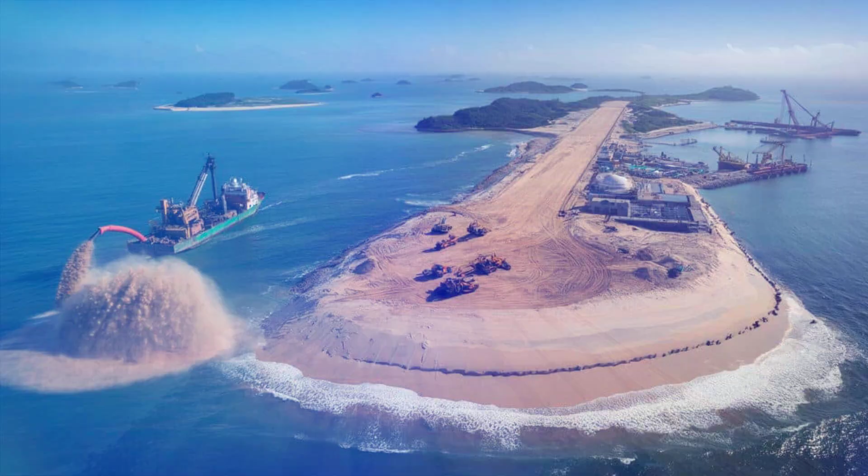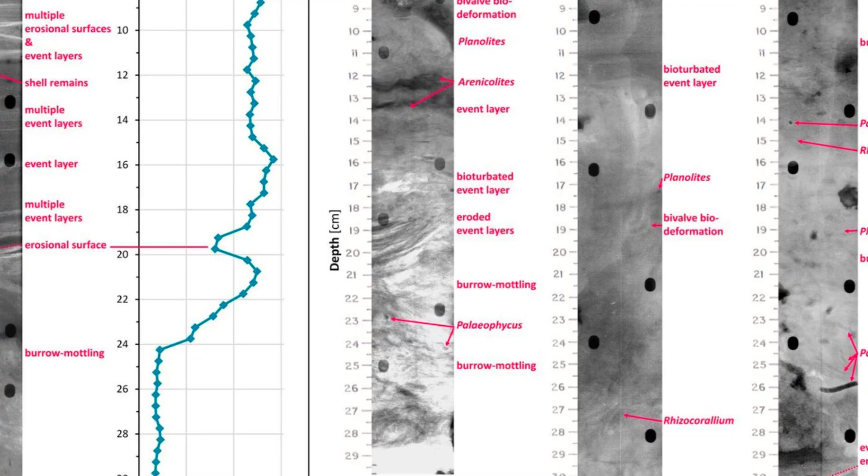They built an entire airport on land that didn't exist a decade ago, an island engineered from the sea. A new Earth built at a reported multi-billion-dollar cost. But beneath this new Earth, the ground is still settling, squeezed downward by hidden layers of soft marine sludge. Some satellite-based models warn that subsidence could reach 80 millimeters each year in places.

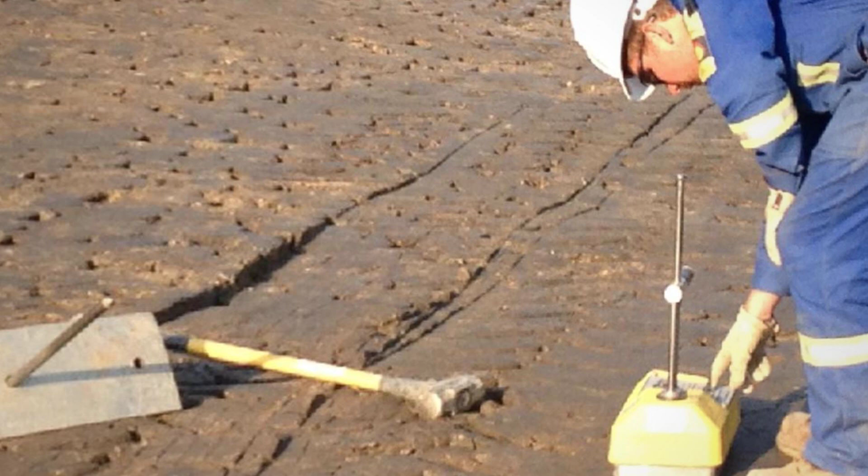The stakes are simple. If engineers can't stop the sink, this could become a permanent repair nightmare instead of a triumph of infrastructure. The real story begins with how they made the island and why the ground may never truly stand still.

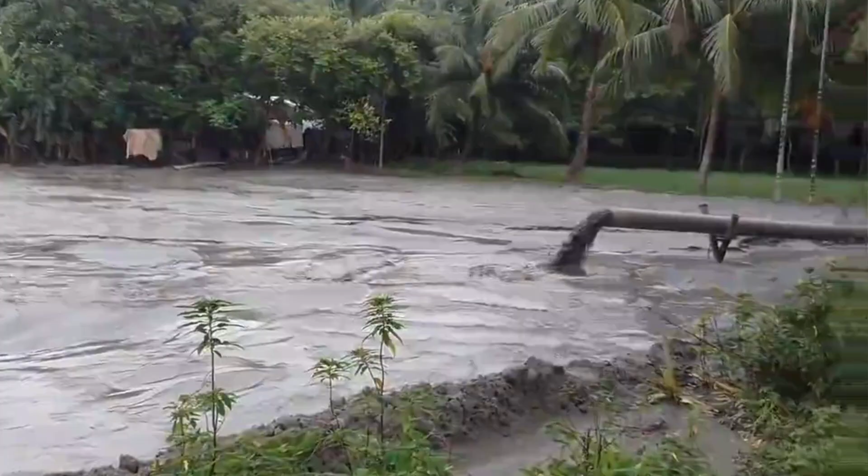In Jinzhou Bay, just off the coast of Dalian, a stretch of open water transformed into solid ground. By the early 2010s, fleets of dredgers and barges began pumping sand and rock into the sea, shaping an artificial island where only waves had rolled before. The footprint is staggering, 21 square kilometers, larger than some city centers.

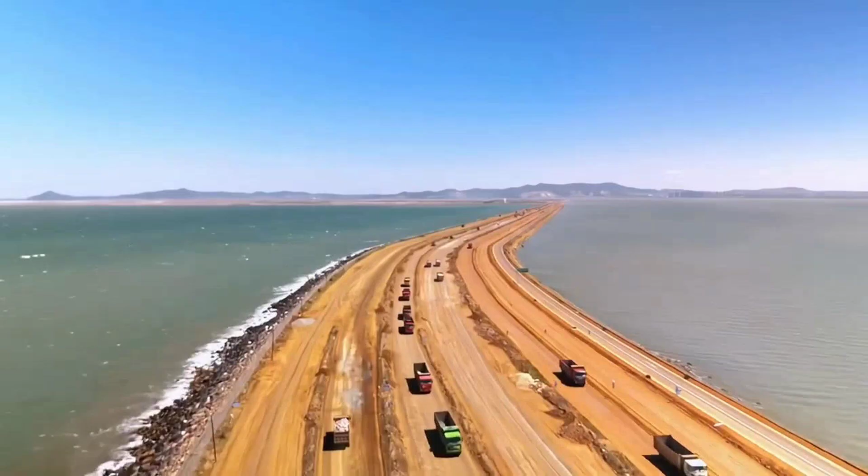In less than a decade, this patch of ocean was filled, leveled, and sculpted to support the weight of a future mega airport. The land didn't simply appear overnight. It rose through millions of tons of fill, layer by layer, as engineers battled tides and shifting currents. Construction started in 2011, even before full national approval, a sign of the urgency to relieve Dalian's overwhelmed old airport.

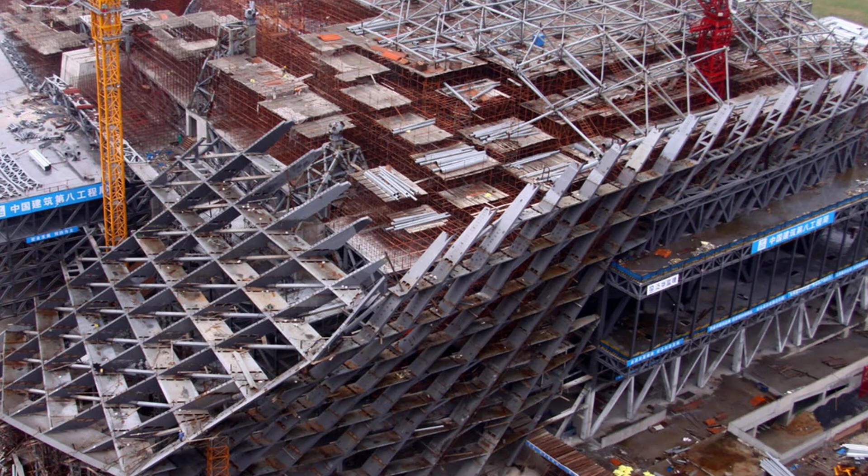By 2024, the new island stood ready for its next phase, already bearing the outlines of runways and the foundations for a terminal designed to welcome tens of millions of travelers. From above, the reclaimed land stretches out in geometric precision, a man-made platform built to handle the world's largest jets. The ambition is clear: to create not just a new airport, but a new piece of China's coastline, engineered from scratch in less than a generation.

Dalian's old airport, Zhoushuizi, once sat on the city edge. Over decades, the city pressed in from all sides, swallowing up open land and closing off every path for expansion. Apartment towers, factories, and highways hemmed in the runways until there was nowhere left to grow. By the early 2000s, the airport's single airstrip was handling more flights than it was ever designed for, with passenger numbers climbing past 19 million a year.

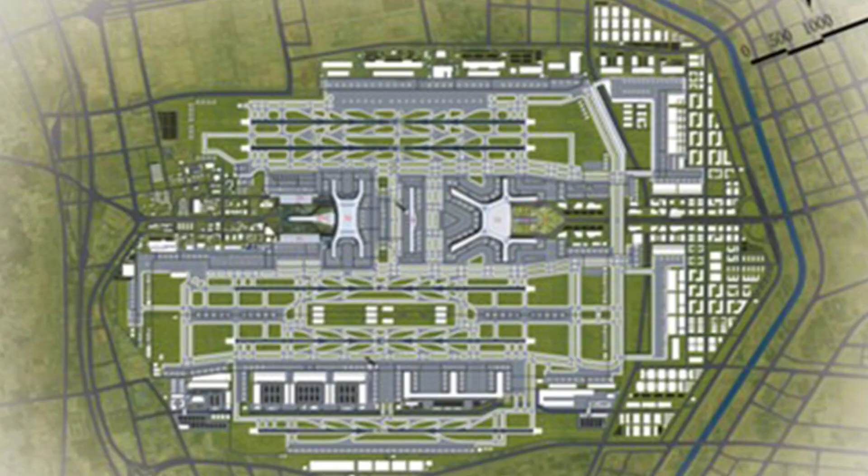Five rounds of upgrades squeezed out every last bit of capacity, but the problems only got worse. Noise complaints rose as jets skimmed low over new neighborhoods. Cargo traffic jammed local roads, and even small delays rippled across the entire network. Planners studied every option: extending runways, building new terminals, tunneling under roads. But the city's relentless growth had boxed them in. There was simply no land left.

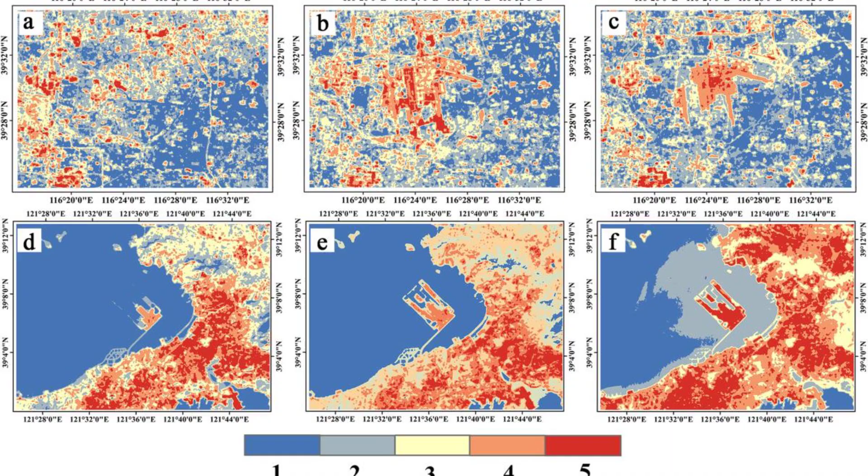When national aviation authorities reviewed Dalian's future, the answer was clear. Relief would only come from outside the city grid. The only way to break free from the urban chokehold was to look offshore, beyond the reach of real estate and traffic. That is why the plan for a new airport was not just about bigger terminals or more gates. It was about creating room to breathe by building an entirely new platform out at sea, far from the limits that had turned the old airport into a bottleneck.

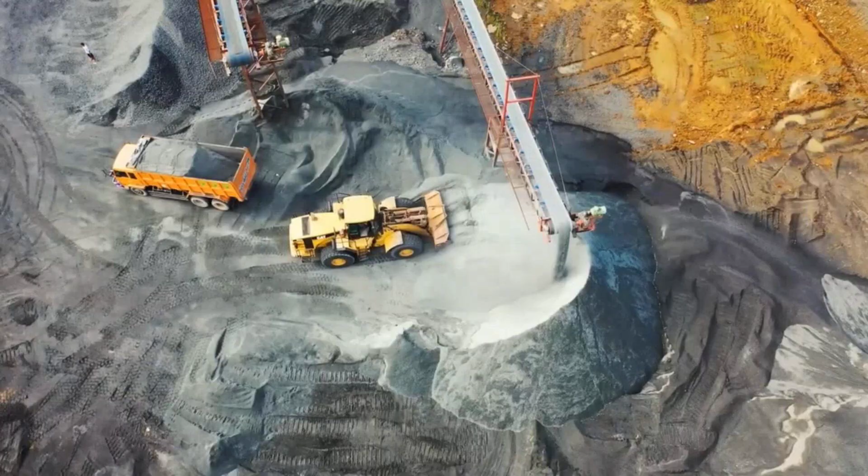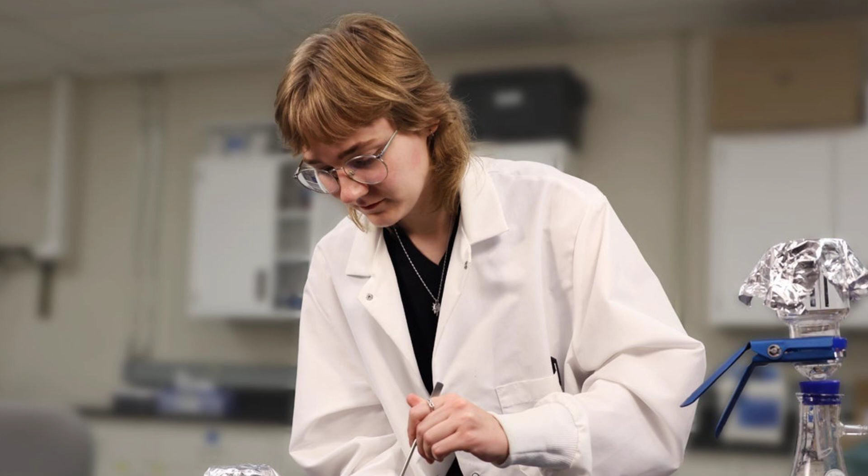Imagine pressing down on a soaked kitchen sponge. At first, it feels soft and squishy, water oozing out with every push. That is almost exactly how the seabed beneath Dalian's artificial island behaves, except on a scale of millions of tons. The fill material, piled high to form the airport's foundation, sits atop layers of mud and silt that act like a giant, waterlogged sponge. When heavy weight is added, the pressure forces water out of the spaces between the tiny soil particles. But unlike a sponge on a countertop, this process takes years, sometimes decades.

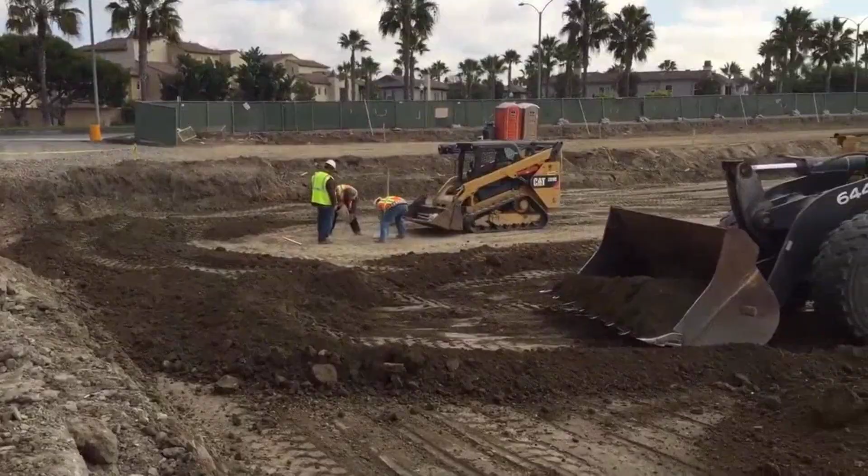The ground does not spring back or instantly firm up. Instead, it compresses slowly, and the surface sinks a little more each season. The challenge for engineers is that this settling can continue long after construction. If the ground keeps compacting, runways and taxiways risk dipping or cracking. Understanding this simple sponge effect is the key to why building on soft marine sludge is never just a one-time job. It is an ongoing battle with the forces hidden below the surface.

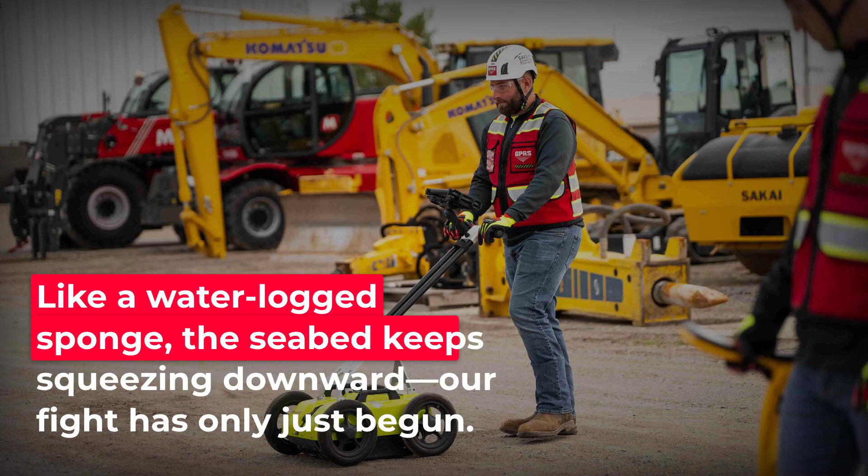Satellites orbiting hundreds of kilometers above the Earth keep a silent watch on Dalian's artificial island. Using a technique called InSAR, they scan the reclaimed land with radar, measuring tiny shifts in elevation that would be invisible to the naked eye. Over months and years, these readings reveal a pattern. The ground beneath the airport is moving, slowly but steadily.

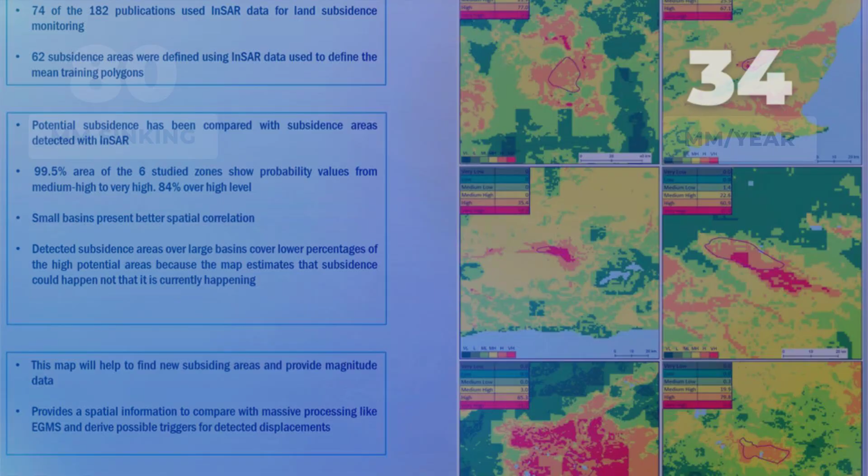Analysts studying this data report that parts of the new island are subsiding by 80 millimeters per year, plus or minus 25 millimeters. This is not a single snapshot, but a trend, one that matches what engineers fear most about building on soft marine sediments. Every new layer of fill and every foundation poured adds more weight, squeezing water from the mud below and causing the surface to drop.

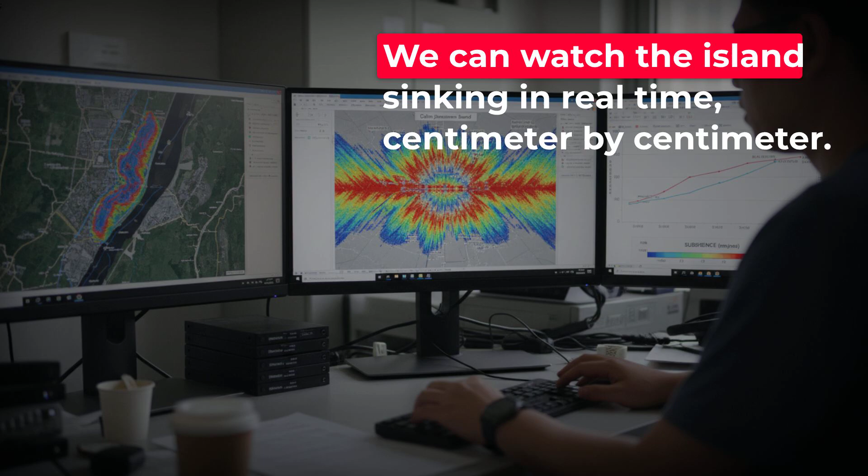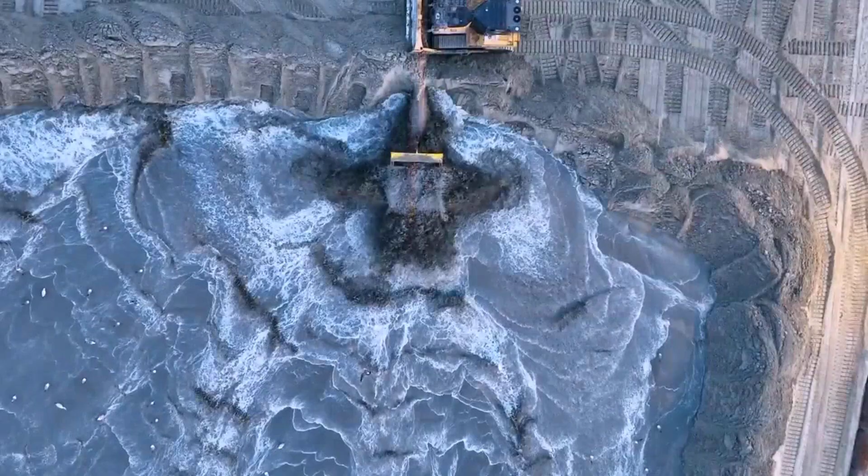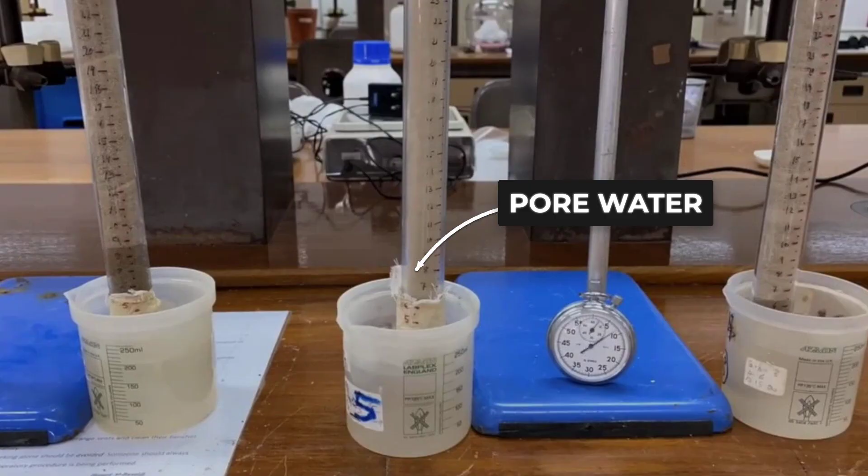Beneath the new island, the process at work is consolidation. When millions of tons of sand and rock press down on a soft seabed, the pressure forces water out of the mud below, and the ground slowly compresses. This is not a sudden collapse, it is a gradual squeeze. Water moves upward through tiny spaces between soil particles, and the land settles bit by bit.

The heaviest sinking happens in the early years after reclamation, when the fill is freshest and the mud is loosest. Over time, as more water escapes and the soil particles pack tighter together, the rate of settlement slows, but it does not stop completely. Even after the surface seems stable, small movements can continue for years, sometimes decades. This lingering uncertainty keeps engineers on edge.

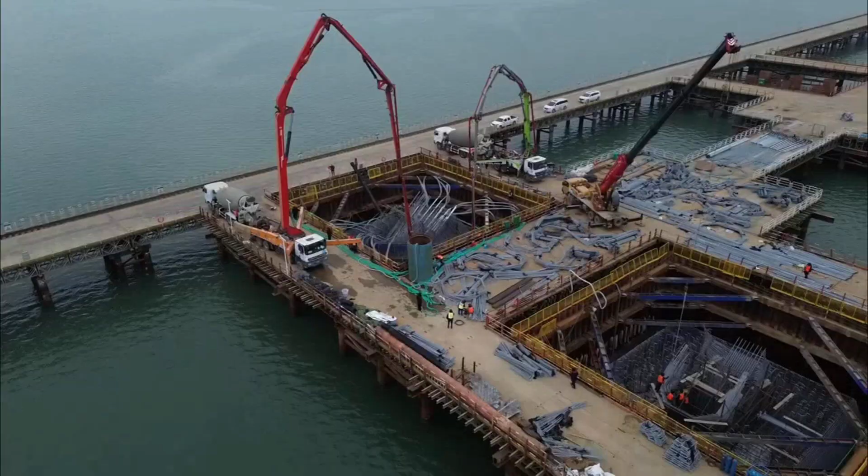The future of the airport depends on how fast the ground firms up, and whether the pace of sinking drops low enough to allow safe construction of runways and terminals. If the soil keeps settling too quickly, the surface could dip unevenly, threatening everything built above. To keep the ground from sinking beneath their feet, engineers turn to a toolkit built for the world's softest soils.

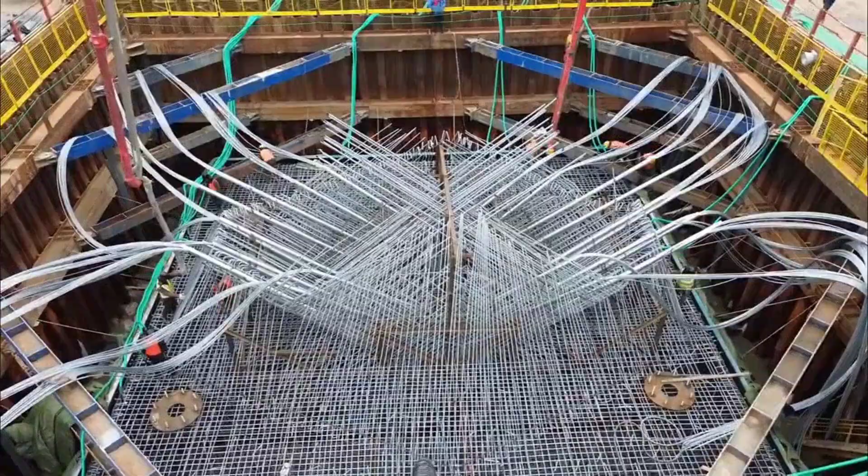The battle began with deep foundation treatment, 77,000 square meters of reclaimed land reinforced to take the weight of runways and terminals. In projects like this, one common method is vacuum preloading. By laying a membrane over the surface and drawing out air and water with pumps, the process squeezes the mud below, forcing it to settle and firm up in months rather than years.

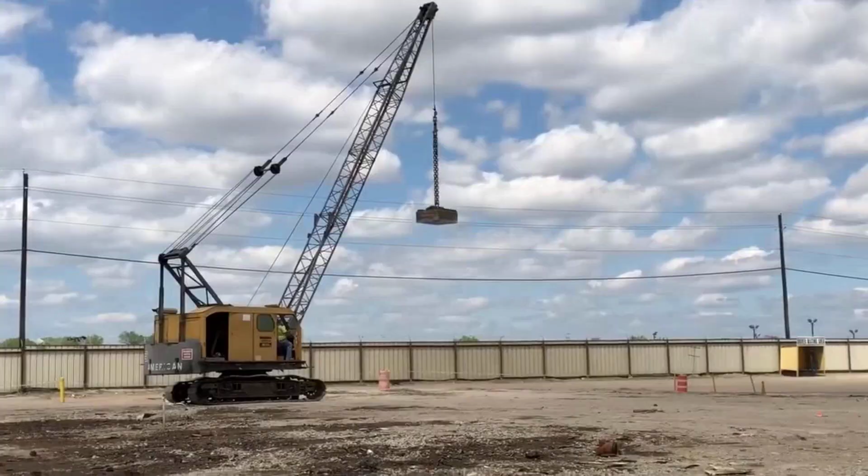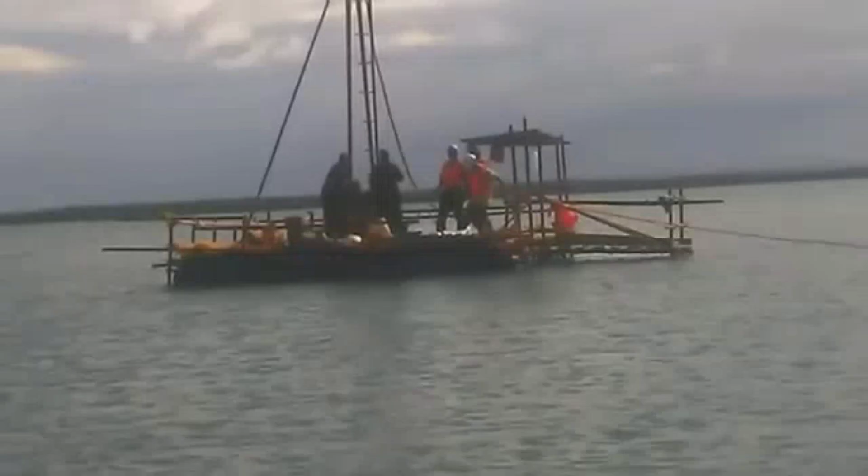Another tactic often used is dynamic compaction. Heavy weights dropped again and again to shake loose sand and silt into a denser, more stable base. Where the soil is too soft, even for that, engineers rely on deep piles, columns of concrete or stone, driven down through the weak layers, anchoring structures to firmer ground far below.

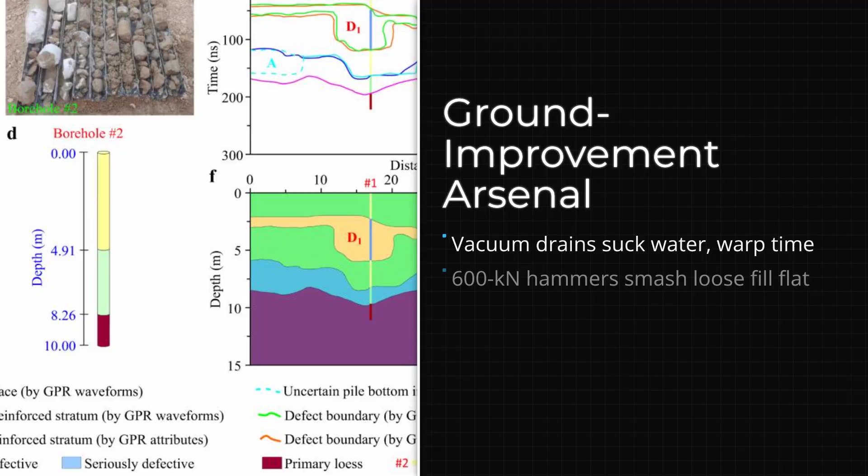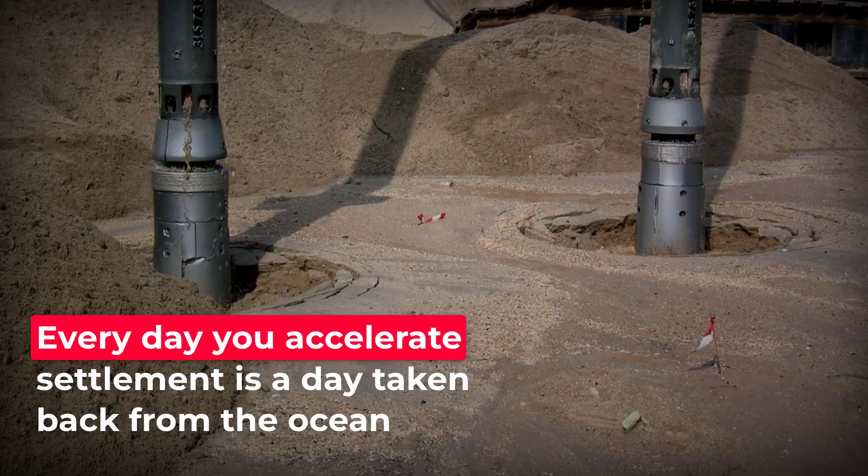Each technique aims to speed up consolidation, control uneven settlement, and buy time for the airport foundations to lock in place. As one academic from Dalian University of Technology puts it, "Every day you can accelerate settlement is a day you take back from the ocean." These methods are not just theory, they are the main line of defense against the slow, relentless squeeze of the seabed, with sensors and gauges tracking every millimeter of movement as the battle continues underground.

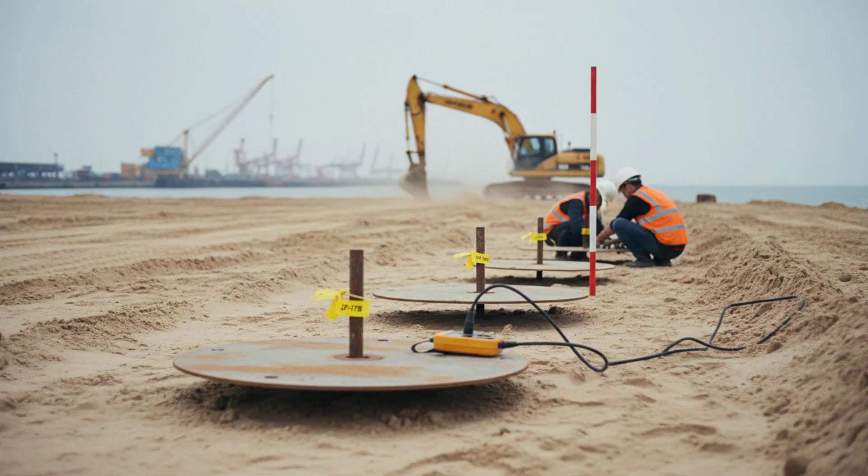Sensors dot the reclaimed ground buried beneath runways and terminal foundations, working around the clock. Settlement plates, simple steel discs anchored deep into the fill, track how far the surface drops over time. Each plate is measured again and again to reveal if the land is settling evenly or if trouble is brewing beneath a certain stretch of pavement.

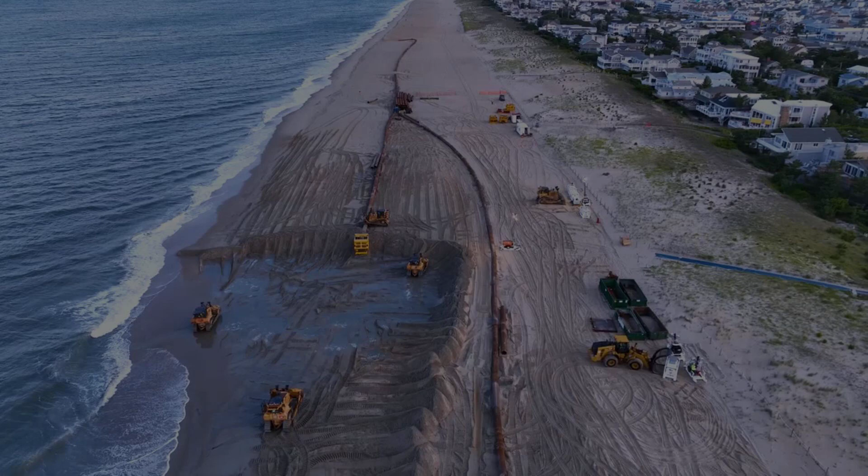Pore pressure gauges, meanwhile, are threaded into the soft layers below. These instruments measure how much water remains trapped between soil particles, a direct signal of how much consolidation is left to go. As water pressure drops, engineers know the ground is firming up, but these readings are only part of the story.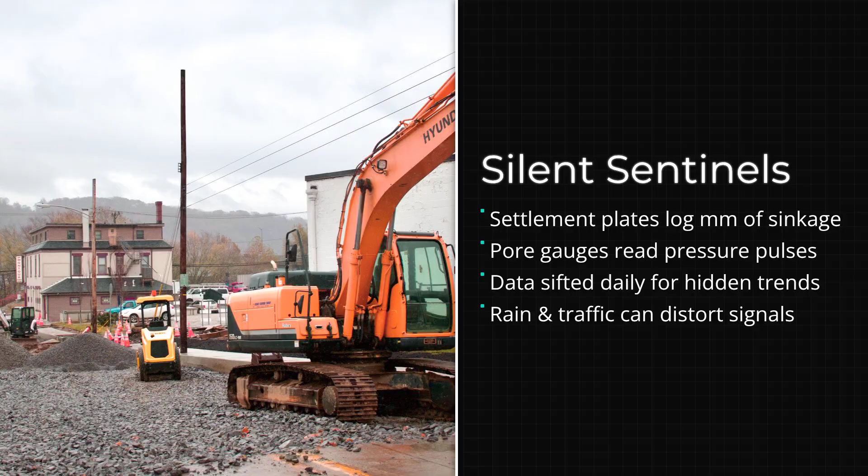In a landscape built from scratch, every number comes with caveats. Some sensors can miss sudden shifts in areas beyond their reach. Others might be thrown off by heavy rain, construction traffic, or even a change in temperature. The real test is not just in the data itself, but in how it is interpreted. Engineers pore over these numbers, looking for patterns and warning signs.

Success is not measured by a single reading, but by a trend: settlement rates slowing, water pressures dropping, and the ground acting more like solid earth than a floating raft. These are the quiet victories that mark progress in a project where the enemy is invisible and always moving.

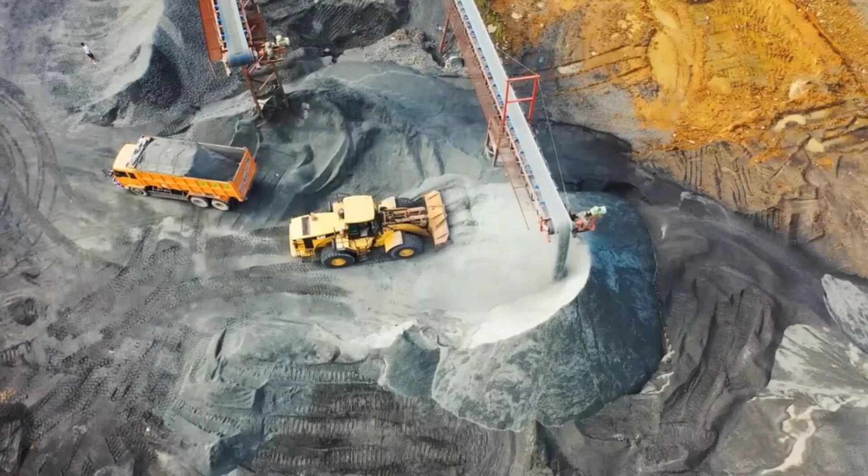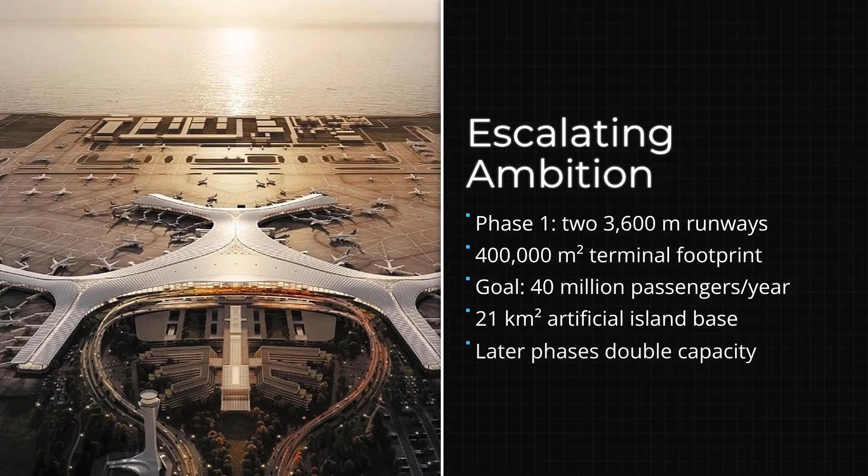The airport's ambitions are measured in phases, each one raising the stakes for what this artificial island must support. The first stage is already massive by global standards, with 2 parallel runways, each stretching 3,600 meters, and a terminal of 400,000 square meters. Depending on which official statement you read, Phase 1 is designed to handle anywhere from 31 to 43 million passengers a year, nearly double the old airport at its peak.

Cargo targets in this initial build reach 650,000 tons annually, a figure that would place the airport among the country's busiest freight hubs from day one. But these numbers are only the beginning.

Plans for the full build-out call for 2 more runways, bringing the total to 4, and an expanded terminal footprint that could swallow up nearly 1 million square meters. If every expansion is realized, the airport's ultimate capacity could reach 70 to 80 million passengers a year and 1 million tons of cargo. These are numbers usually reserved for the world's largest aviation gateways.

Each phase locks in more weight, more traffic, and more pressure on the ground below. The prize is clear: a new gateway for Northeast Asia, built on land where none existed before. But as the scale grows, so does the risk that the ground may not keep up with the vision.

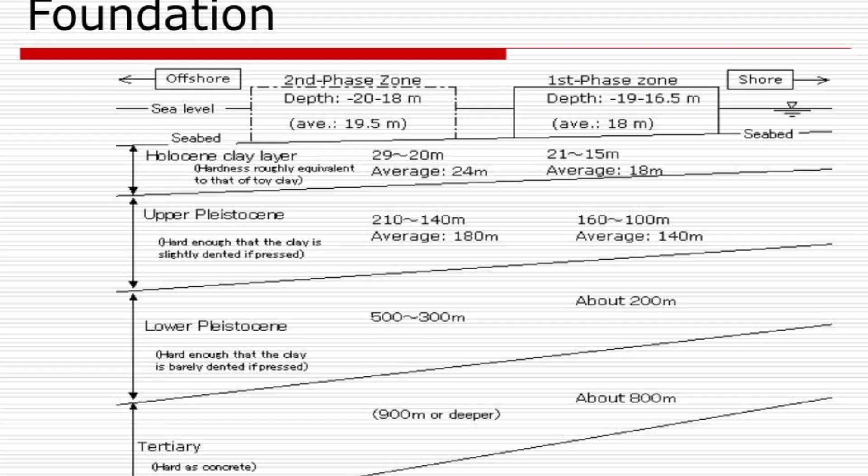Kansai International Airport in Japan stands as a cautionary tale for anyone building on reclaimed land. When it opened in 1994, engineers expected the artificial island to settle, but no one predicted just how much. Over the next 2 decades, the ground dropped more than 11 meters. That was far beyond early forecasts. Each year, the airport runways and terminals inched lower, forcing teams to jack up buildings, reinforce seawalls, and run pumps day and night to keep water out.

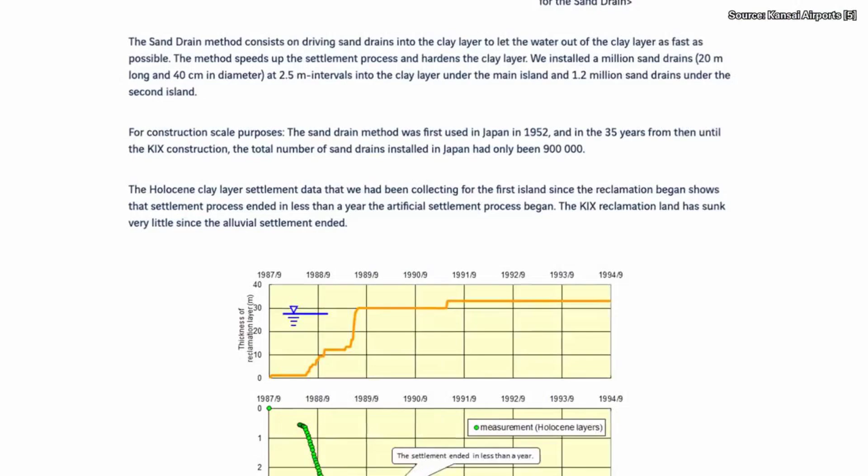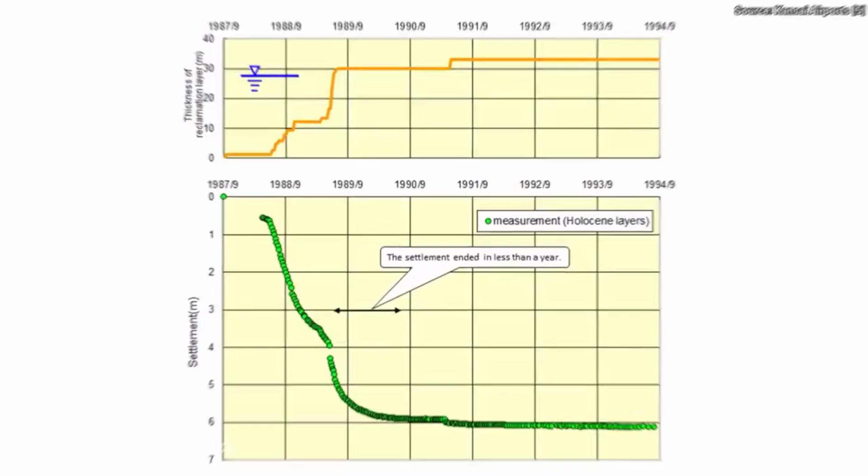The costs never stopped. By 2010, Kansai's ongoing mitigation had already swallowed billions of dollars, with maintenance budgets stretching into the indefinite future. A longtime airport engineer described the problem plainly. "We designed for the ground to move, but it kept moving, year after year, and every fix became part of the routine." Even today, Kansai's island still sinks, though at a slower pace, and the airport's survival depends on a permanent commitment to repairs.

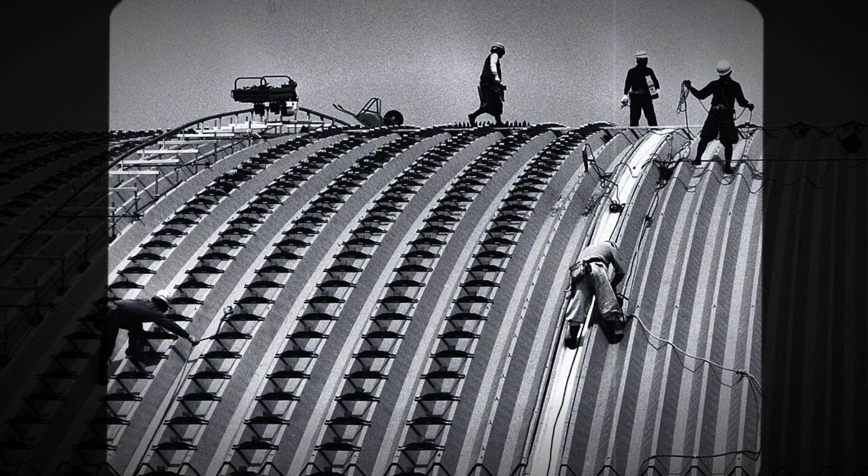The lesson is clear: on soft marine sediments, settlement is not a one-time problem. It is a legacy that can last for generations, with every meter of subsidence leaving a bill that never quite goes away.

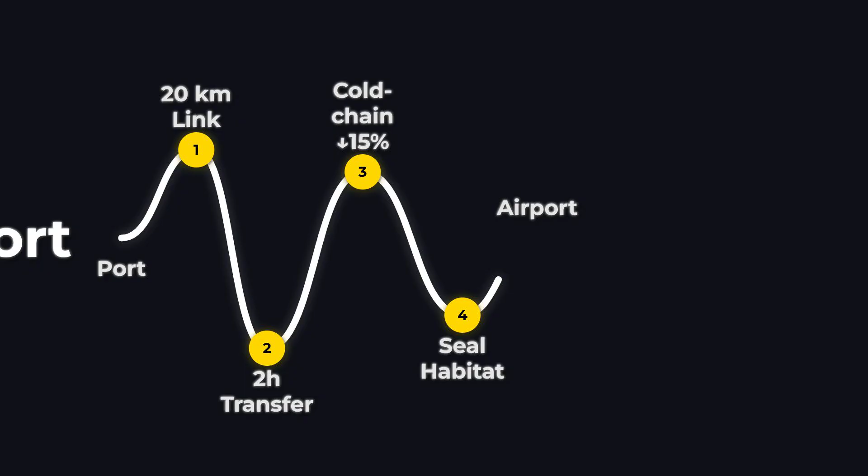Port officials in Dalian see the new airport as more than just an answer to crowded runways. They see it as a gateway that finally links air and sea freight in one seamless logistics network, connecting cargo ships and jetliners under a single plan. For a port city competing with giants like Shanghai and Incheon, the integration is a strategic bet. The payoff could be enormous: faster shipping times, new trade routes, and a surge in economic activity that ripples through Northeast China. One logistics planner puts it simply: you can't grow the port or the airport without more space. Here, we get both.

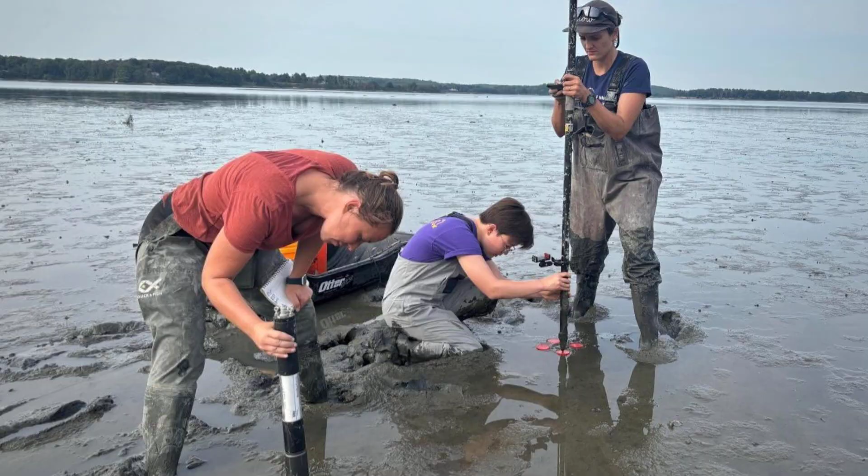Every gain comes with a cost. Marine biologists warn of risks tied to large-scale reclamation. Jinzhou Bay, part of the Bohai Sea, is home to spotted seals, an iconic species that migrates along these coasts. Regional research warns that noise, sediment plumes, and habitat loss can disrupt seal behavior and threaten local populations. Construction windows are sometimes adjusted to avoid peak migration, but the long-term effects remain uncertain.

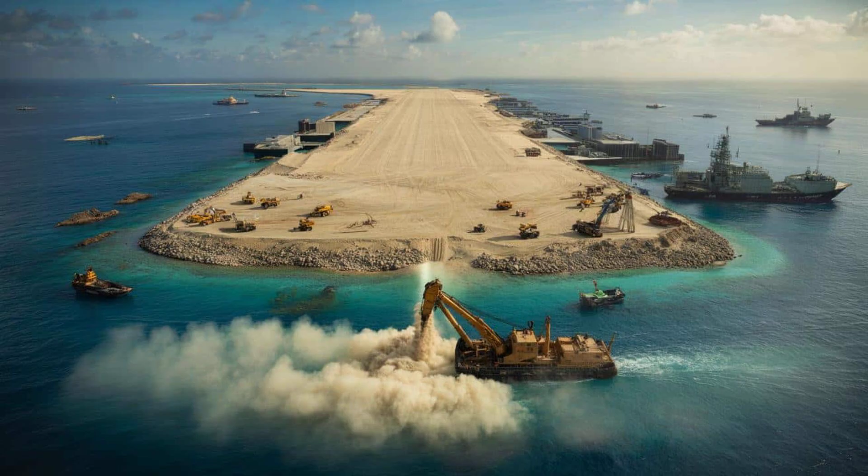A marine scientist says, "Big infrastructure always brings trade-offs. The challenge is balancing economic ambition with the health of the ecosystem." For Dalian, the promise of a world-class transport hub is weighed against the responsibility to protect a unique marine environment. The final verdict on that balance will play out over decades as both ships and seals navigate the changing shores of Jinzhou Bay.

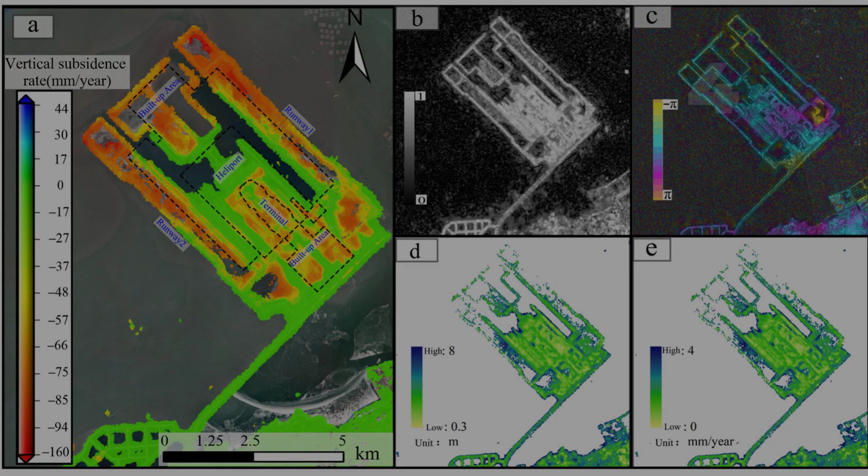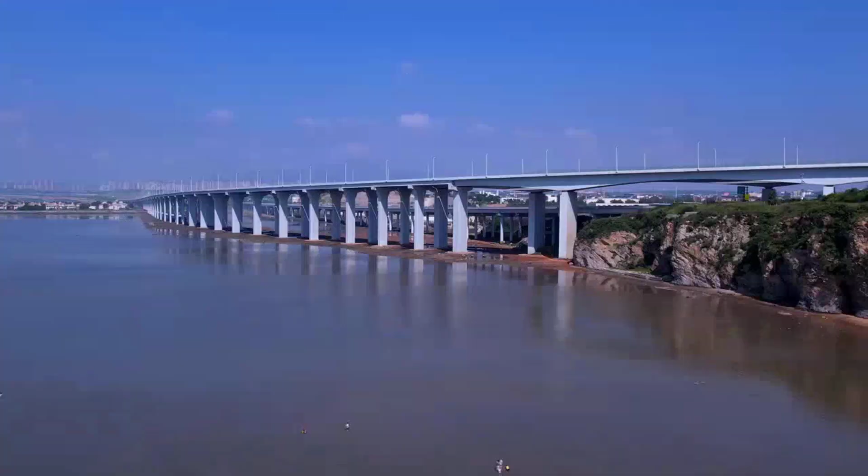Dalian Jinzhouwan Airport, offshore artificial island. Reported project cost: CNY 26.3 billion, approximately $4.3 billion. Subsidence forecast: approximately 80 millimeters per year, plus or minus 25 millimeters per year, estimated from InSAR plus modeling. Phase 1: 2 runways reported. Ground improvement: vacuum and compaction reported. Comparison: Kansai artificial island precedent. Opening target: 2026 reported. These are the facts as reported and modeled.

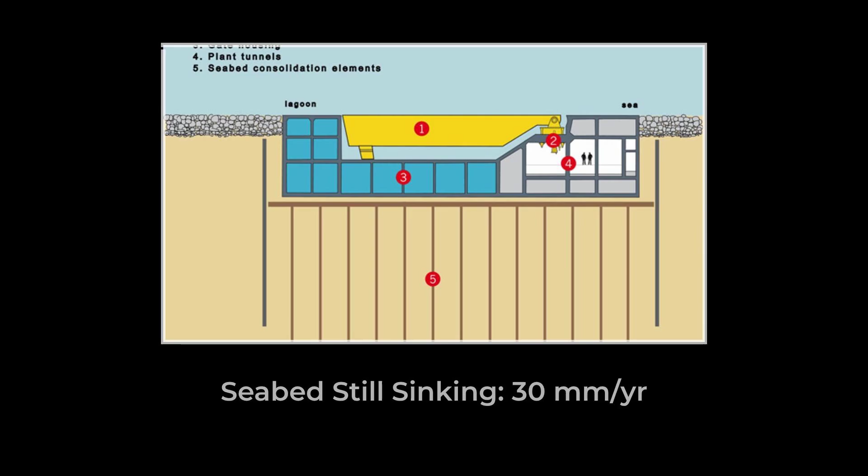An airport built on land that did not exist a decade ago. A price tag in the multi-billion range, officially CNY 26.3 billion, or approximately $4.3 billion, with some reports claiming even more. A foundation that continues settling, shrinking, and compressing as seabed mud expels water and squeezes down. Satellites can measure this movement year by year, and research using InSAR plus consolidation modeling predicts rates on the order of 80 millimeters per year, plus or minus 25 millimeters, slowing over time.

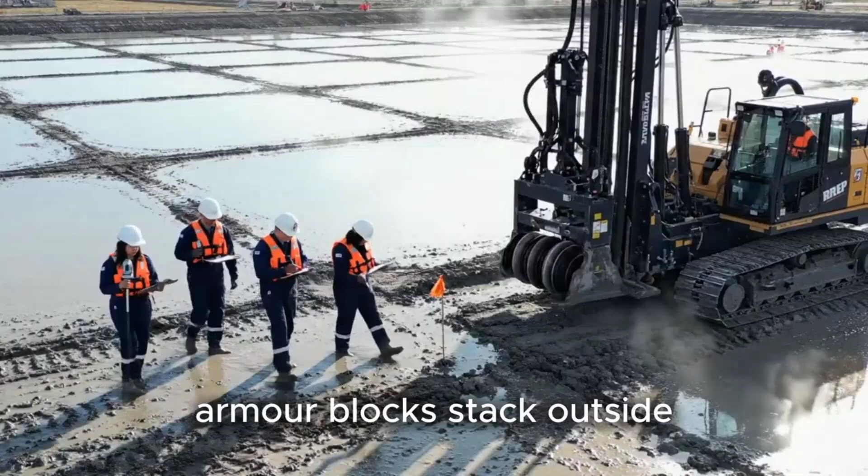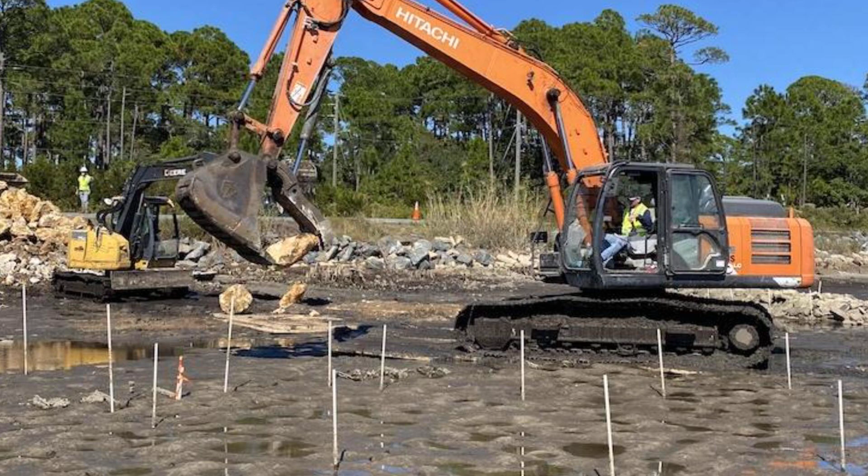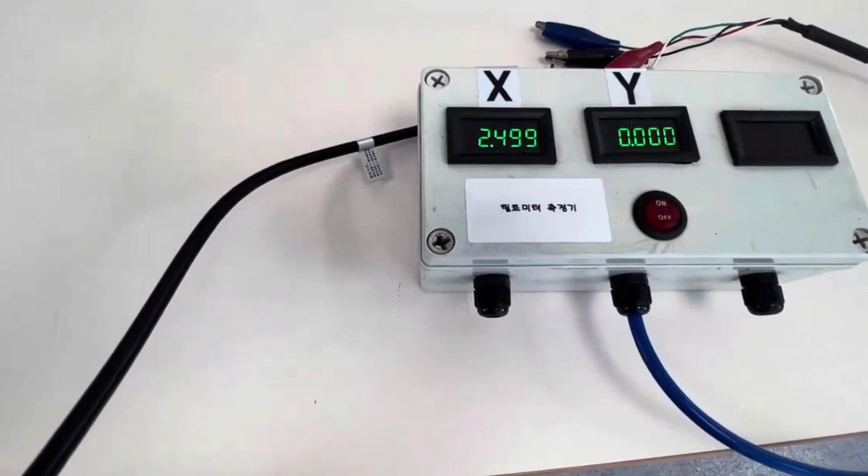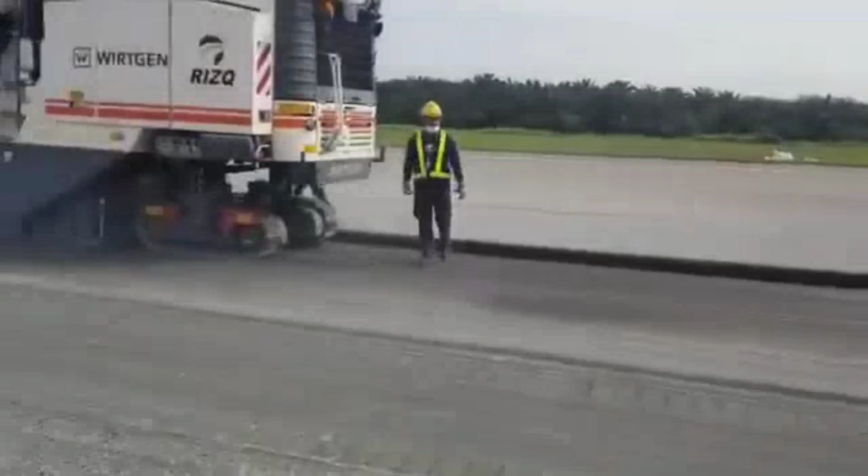Engineers have mounted a counterattack: vacuum preloading to remove water faster, compaction techniques to densify the fill, deep foundations and other ground improvement methods are reported in project coverage. These are the defenses, yet the ground beneath remains restless. The opening target stands at 2026, but every millimeter of movement is a reminder of what is at stake. Kansai's legacy hangs over the project. That well-known artificial island airport experienced long-term settlement and required continuous mitigation. It is a warning that even the best plans can lead to decades of repairs.

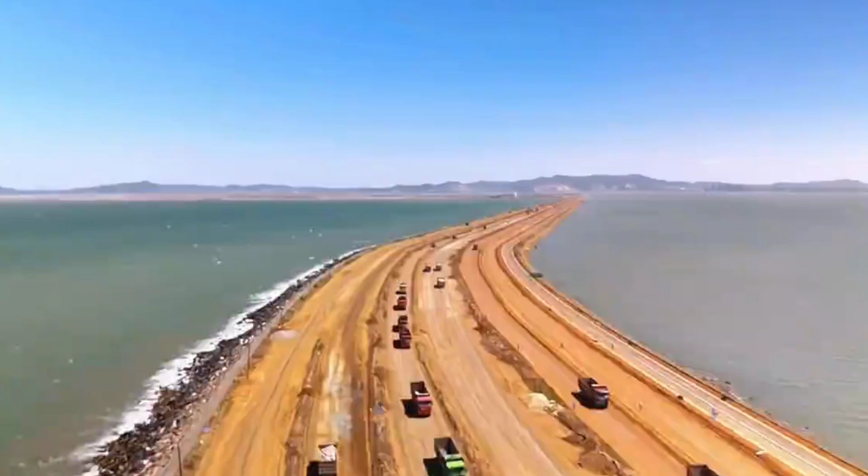The challenge is simple to state and hard to solve. Can this new piece of Earth be stabilized before the first flights take off? Or will Dalian's mega airport become a permanent battle with the sea? They did not just build an airport, they built a new piece of Earth. Now they have to prove it will not keep sinking back into the sea.

Right now, engineers race physics. Multi-billion-dollar ambition faces the slow, relentless force of the sea. As global coastlines sink and cities keep expanding outward, Dalian's project is more than local risk. It is a test of whether human ingenuity can truly override nature's timeline. In the end, every artificial island airport asks the same question. Can we ever build ground that will outlast the ocean?